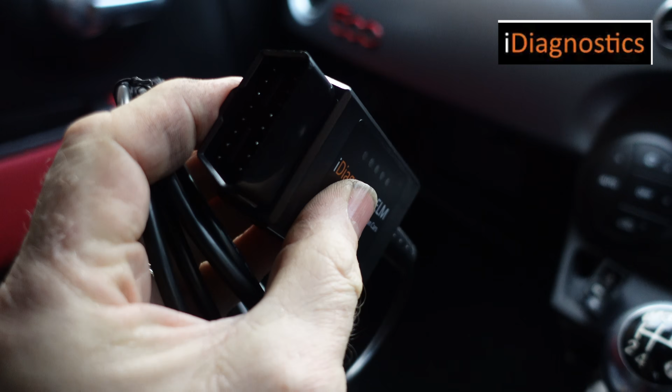So where do you get the cable from? Now, this is where I recommend you get it from. So here we have the ELM itself. As I say, you've got an OBD plug there, a length of cable with an ordinary USB-A on the side.

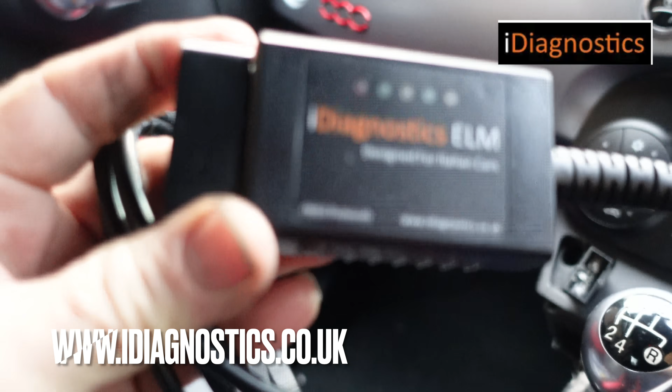This comes from the website iDiagnostics.co.uk. If you go onto that website, www.idiagnostics.co.uk, put in Fiat, and you will find this in various different forms. You can buy it with lots of different cables. As I say, you only really need the yellow, so I would start off with the yellow.

Now, if you are going to use this on a car which is approximately 2018 onwards, you may have a problem with some things that you need to do, and I believe a PROXI alignment is one of them. Now, I have never ever needed this so far, but if you do, the newer Fiats have what is called a security gateway, which stops people like us doing things to our cars because Fiat don't like it.

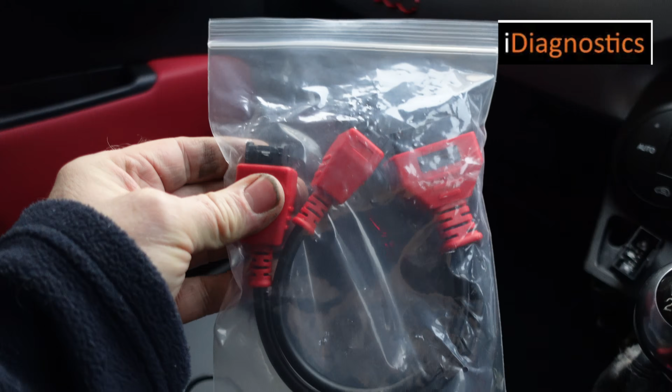So what you need is what I've just shown you there, and this. It's an SGW bypass. Now the SGW gateway is down there somewhere. I haven't had a car with it yet, but you get to it under there somewhere, and it just plugs in, and then you plug your normal cable into that rather than into the OBD port, and it will bypass it and think you are a Fiat technician.

So that's the SGW. Now you can buy that separately on iDiagnostics.co.uk if you need it. If your car is older than 2017, you don't need it at all. And as I say, it's only certain things. So that's all you need: the cable, yellow converter cable, and as I say, the other thing if you need that as well.

So if you've got a Fiat 500, €50 for the software, direct from MultiECUScan.net, and a cable and converter from iDiagnostics.co.uk. You will find that they are much cheaper than going to one of the preferred suppliers on the MultiECUScan website, such as Gendan. Now, a lot of people go to Gendan direct and they will buy the software and cables. Much, much, much more expensive than buying them like this.

If you're in the USA, I don't know whether iDiagnostics.co.uk will ship outside of the UK. I will look at the website and we will confirm whether that's the case or not. But as it stands, I don't believe that they do. If they do, then I will put it on screen here. Obviously, you would need to pay shipping. But you can buy it in the USA as well, not an issue buying the cables. Again, you can probably get them on eBay as well.

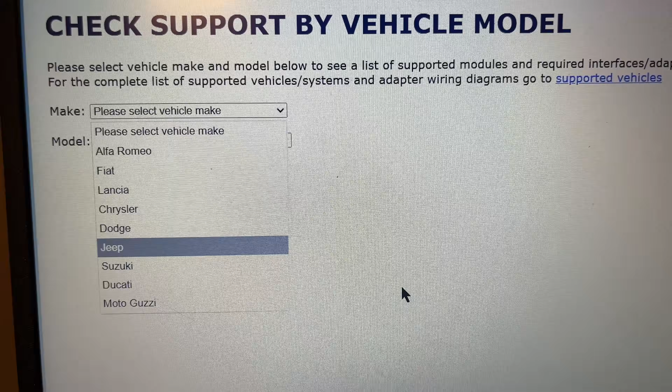The MultiECUScan website even includes a forum, so if you've got a problem, someone else would have had that problem and you could speak to people on the forum to help you out.

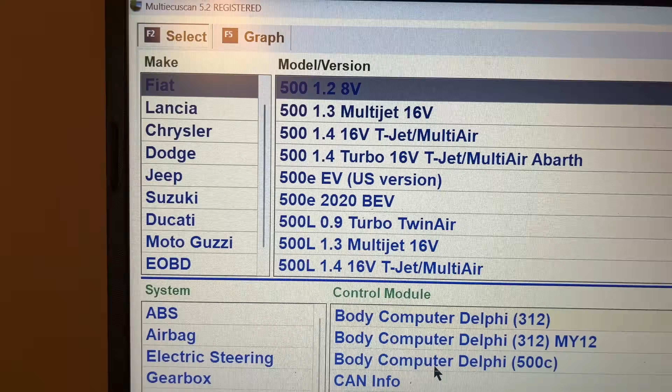At the bottom of the page you can see I was downloading it. It's not massive, downloads in a minute or so. Current version is 5.2, and there you can see the manufacturers it covers: Fiat, Lancia, Chrysler, Dodge, Jeep, Suzuki, Ducati, Moto Guzzi, and the EOBD. I've never really fathomed out what that was all about.

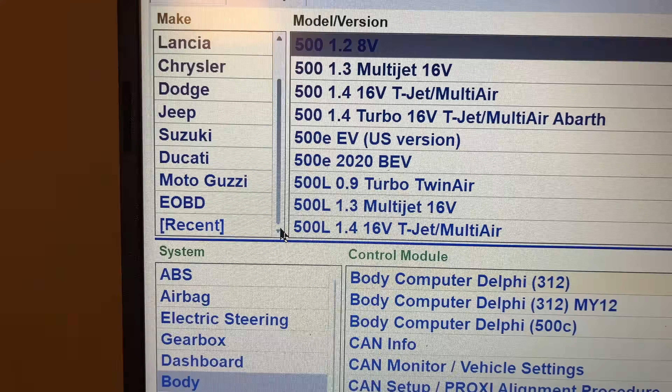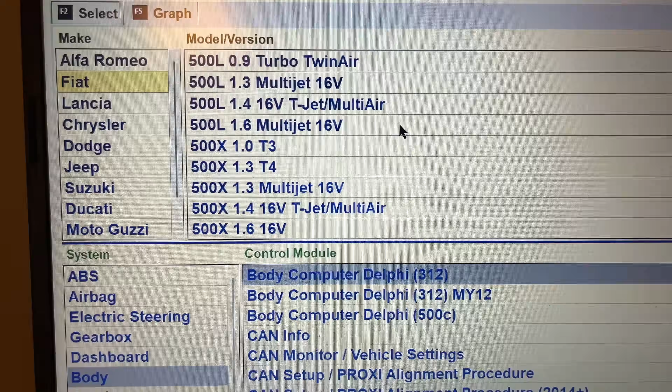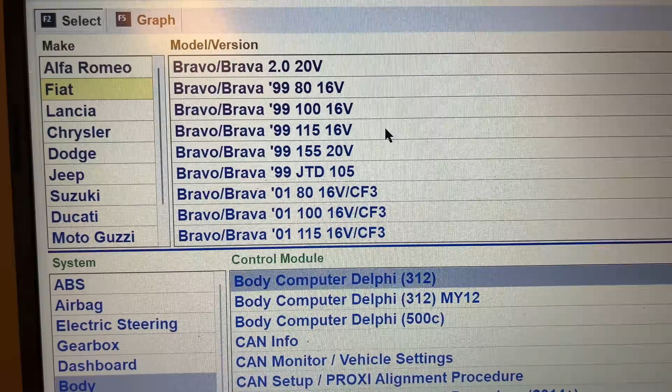So if we go back to Fiat, you can see on the right hand side the models. There are lots and lots and lots of models: the 500, the 500L, the 500X, European cars that we don't have, Barchettas, Bravo or Brava. Lots of different incantations of that. The list just goes on and on.

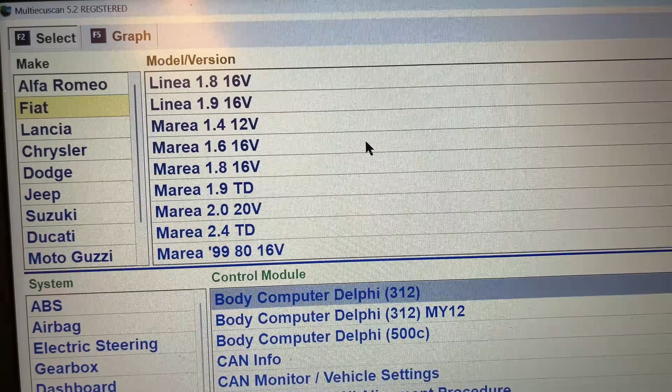The Fiat Coupe, the Doblo, the Ducato, Fiorino, Fremont, Gran Punto, the Fiat Idea, Linea, Marea, Multipla. It just goes on and on, and as you can see, it's in alphabetical order.

The Panda and the Punto, obviously, as well. The Scudo, the Seicento, the Tipo, and the Fiat Uno going back in time, but up to the 2015 model. So everything is covered.

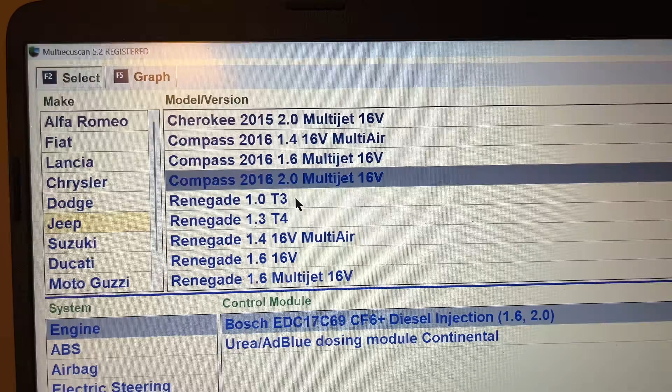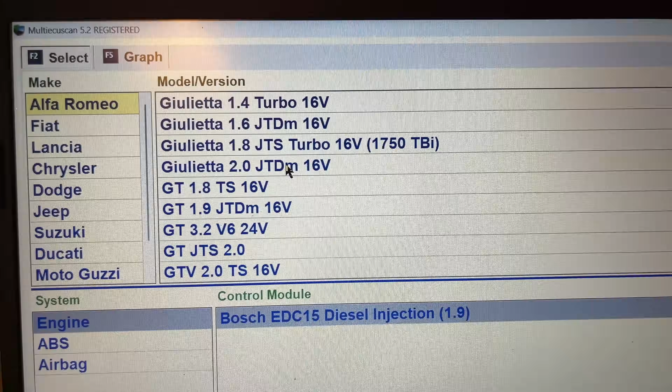If you quickly look at Jeep, you can see there's the Compass, the Renegade, etc. Alfa Romeos, the list goes on and on - you've got them all numbered: 156, 159, 164, 166, the Brera, GTV, the Mito, the Spider. It goes on and on.

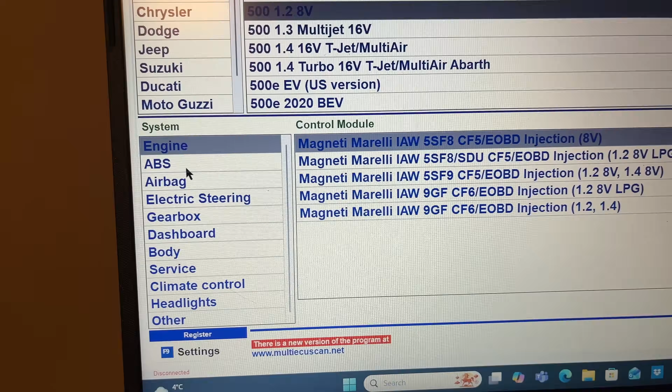And if you go again back to Fiat, you can see there the engine ECU, so you choose whichever engine you've got on the right hand side.

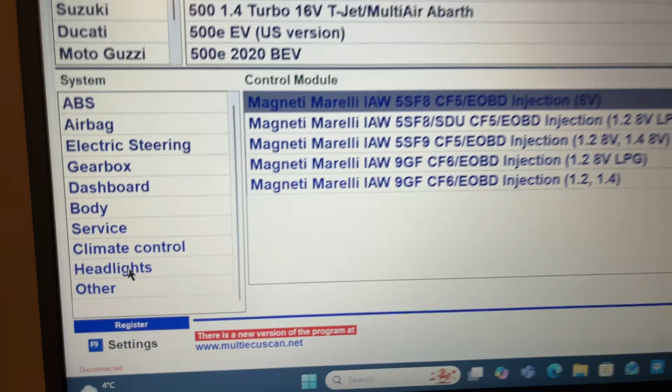You can connect to so many things - the headlights there, as you can see. I believe the general headlights aren't accessible as such, I think it's the flash, the posh ones, I've forgotten what they're called now. So there you go, the settings there.

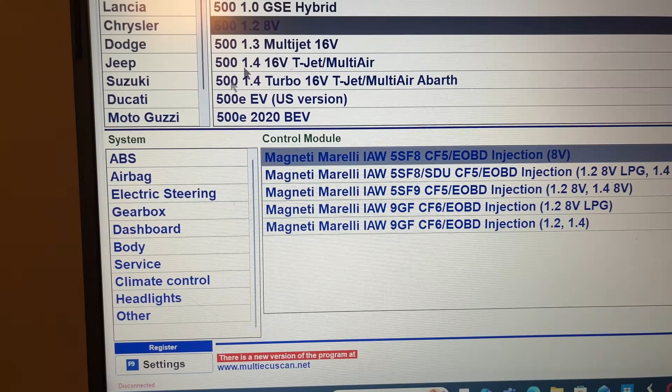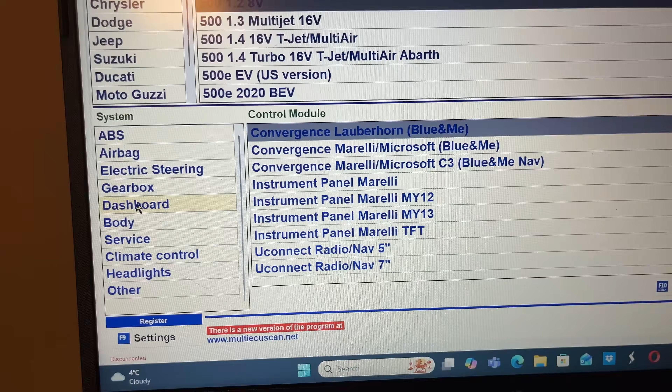You just have to make sure in your interface the correct one is selected there. So you've got the ABS, two types of ABS, the airbags - it covers all the airbags - the electric steering, the automatic gearbox, the dashboard which includes your Blue and Me as well, body computer, the different types of body computer, and that's where you do your proxy alignment from.

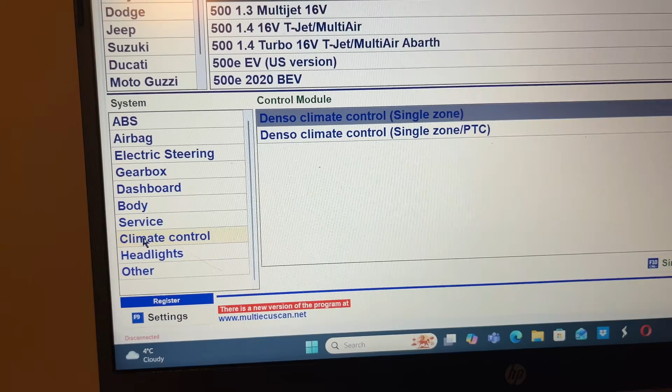You can adjust the service intervals, reset your services, connect to the climate control, the xenon headlights you can connect to as well, and then there's parking control and tyre pressure monitors as well. So it literally covers every system there is.

And then just finally we can go onto the iDiagnostics website. As you say, you can choose the car there and your engine, do a search, and it will show you all the available things for you.

So you can see there you've got all the cables. The one that I got is a little bit further down. As I say, you don't need all those. The prices are in pounds on here, and as you scroll down you can see, now that's the one I bought - they sent it to me for free, but that's the one I originally bought.

£28.60 for the ELM and the yellow adapter. So that is really what you need, certainly to start with.

You can get the SGW bypass as well if you want to, if you need it, if you've got a car that's 2018 onwards and you want to do things like proxy alignments. As I say, there are certain things that Fiat don't allow you to do.

Yeah, there's plenty of things there to choose from. And as I say, they do ship also to the USA and the rest of the world, as well as Europe, which I didn't realise when I first started filming the video.

So I hope this has been useful for you. I wanted to do this video purely because on social media and via my YouTube channel, I get so many people asking how do I do this, how do I do that. And this is the answer, multi-ECU scan.